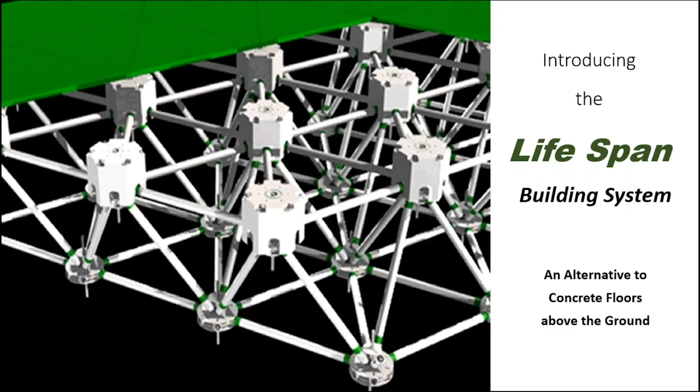I am Doug Leonardi. I am the president of Leonardi's Workshop, as we call it, but also the developer of a system that we came up with a few years back, specifically called the LifeSpan system, as you're seeing here.

LifeSpan Building Systems was started originally, we're a private company working with WPI, but we were originally created to improve the built environment after 9/11.

I don't want to get morose, but the fact is, after 9/11, everybody started looking at the political and the military and the economic aspects, and I looked at the mechanical engineering and wanted to know how to make sure that never happened again. So it wasn't to me about anything other than making sure that no matter what hit any building, that building should never itself be a danger.

So first of all, it was founded with the idea of improving the safety of buildings, then the livability of the buildings. And then once we started to do that, we realized that improved the sustainability of the buildings much more than we expected. In fact, much more than some of the other products out there designed specifically for sustainability.

Who we are right now, and this is important to the conversation, we are system tested, but not certified for use in industry because we haven't gone through all the factory mutual testing. We have done our lab testing, and we have proven the fact, and we've done all of our analyses, and every professor and engineer involved in this knows that it's going to work. We just have to get factory mutual certification before anything can be built right now.

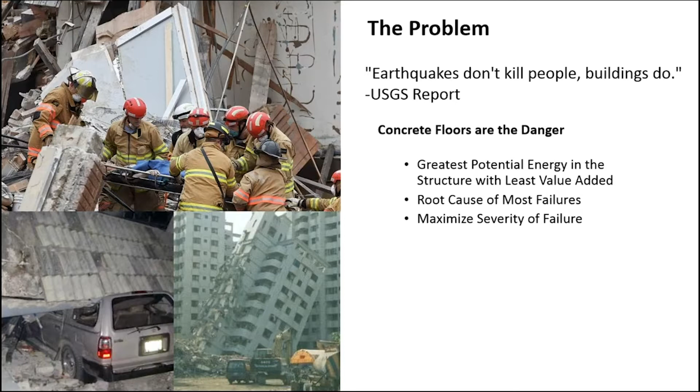And even though we had multiple ways in which it could fail, it usually was the weight that was doing it. And they also maximized the severity of the failure.

And they are the reason why most injuries and deaths occur, and it is the floors and the concrete that endanger the first responders when they show up to a building. They also create dust and waste when they collapse, and there are carbon emissions just from the construction of them. So, not to mention costs.

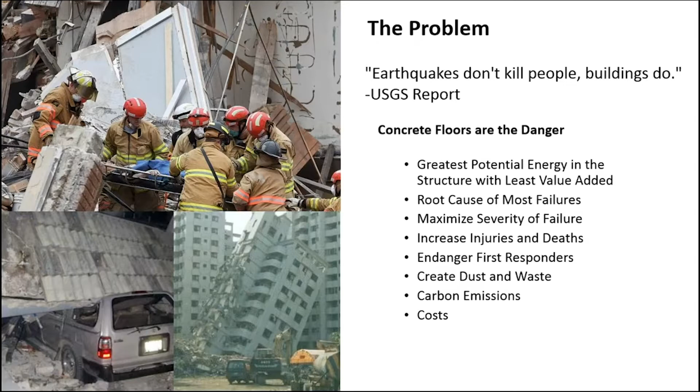So when we looked at the buildings, we realized that the real problem in the way buildings are built today was in the concrete floors.

They cause progressive collapse, which is infrequent, but it is immensely severe and complete. Destroys the whole building, everybody in it, in a matter of seconds, usually, before anybody even knows the building is failing. And it's always the fault of the floors, because you don't have enough weight to initiate progressive failure other than with those concrete floors.

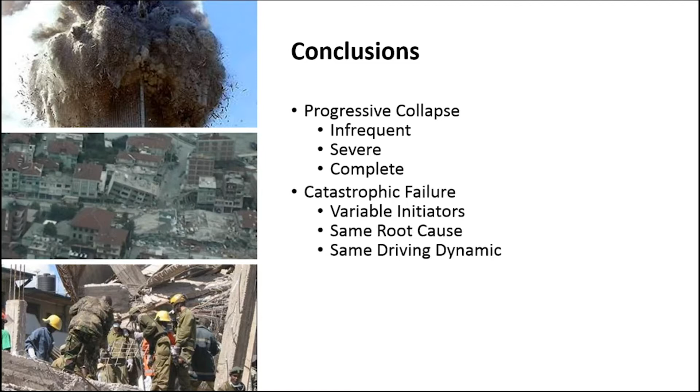Catastrophic failure comes from a lot of different places, but invariably it really comes from the weight of the concrete floors driving down. Now, in the last 20 years, we've gotten better at making sure they don't fall down as much, but when they do, they still kill just as many people.

And in the end, boiling it all down, we figured out that the floors are really the weak point of the design of modern buildings, that essentially we have improved every aspect of our buildings over the last 100 years, except we're still making the floors out of stone.

As Daniel Levitt said, we need to make sure that when these things happen, they don't kill everybody. We can't make a building that will not fall down at all.

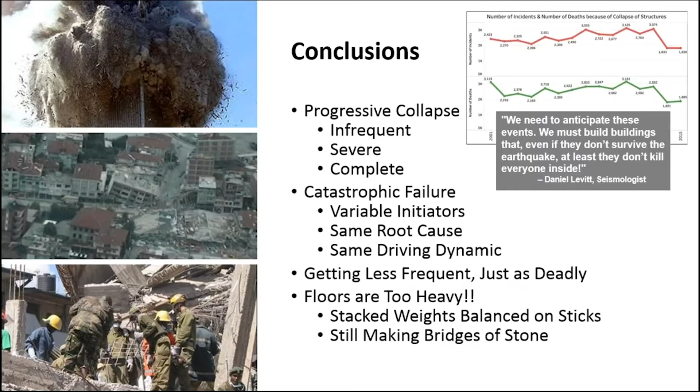We can only make one that doesn't kill everyone when it does, because eventually everything's going to fall down. They're all just weights being suspended in the air. Less weight, less chance of it falling. So our solution was to replace the concrete floors completely. That removes the potential energy of it. It removes the potential for progressive collapse entirely, because no floor has enough weight to trigger the collapse of the floor below it, which triggers the collapse of the floor below that. And that's really progressive collapse.

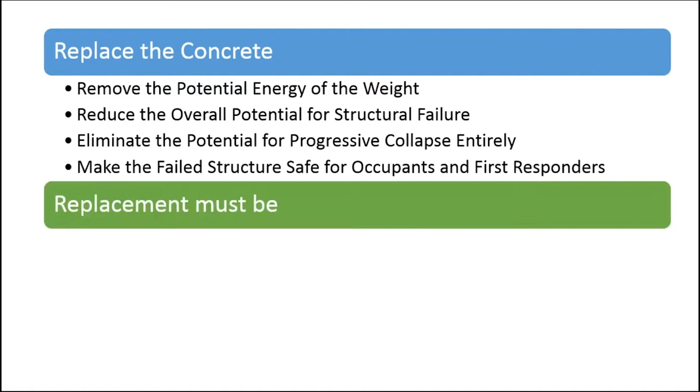We had to make sure whatever we replaced it with was stronger, but lighter and just as rigid, because it has to still do everything that the concrete floor did. It just has to do it lighter and more flexibly. And it has to be at least cost competitive with the existing solution, which is basic concrete.

I'm actually getting a lot of wind out there. I might get a tornado, we'll see.

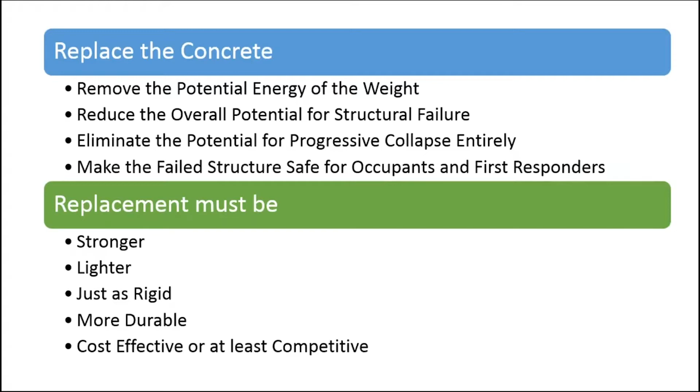In any case, what we came up with after a couple of years of looking at this was a system we called the LifeSpan system. It used to be called Safety Span, which is why there was some naming confusion before, but it's currently called the LifeSpan system because it's actually much more than just safety.

The system as a whole is much stronger, safer, and lighter than any concrete floors in existing buildings today. Easier to put in than existing concrete and actually cheaper than concrete. And then when we looked at the whole thing, it was immensely greener as well. Far more sustainable than any of the concrete buildings being put up today, sometimes by an order of magnitude - sometimes a 10th the concrete carbon emissions coming out of that building.

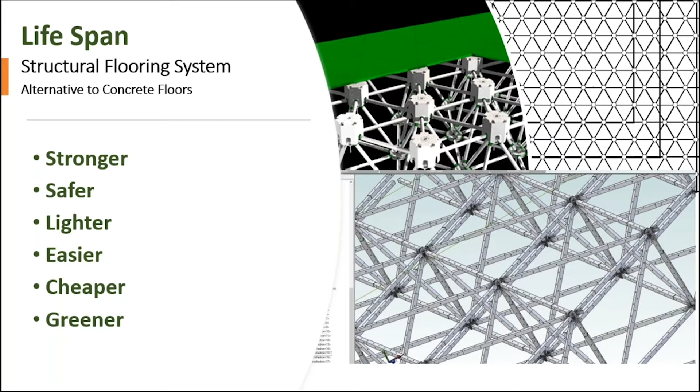In any case, we'll get to that in detail. Please, by the way, I'd like to have a conversation. So if anybody here is either concerned or has questions or is confused, please speak up.

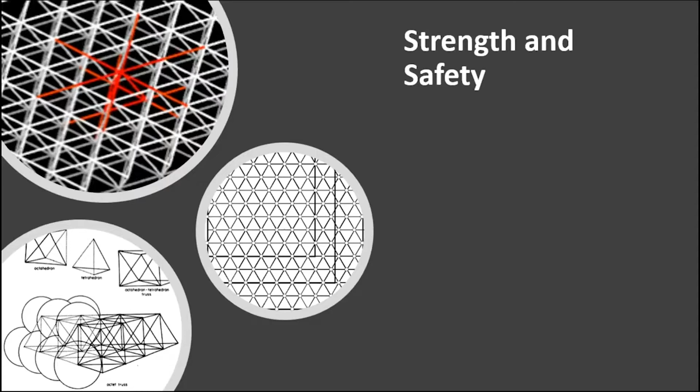Our key here was to make sure that whatever building we make is going to be strong and safe. So we came up with a cage in place of a concrete slab. That cage had to have a rigid geometry, but also a shock durability.

So it can absorb some level of shock. There's the ability to dissipate energy into the frame, but also have enough rigidity to be able to keep the building straight the way concrete would as a rigid membrane. Load redundancy, so that if any part fails, there's always other parts to pick up. So we have a three-dimensional geodesic lattice that is ideally geometrically designed to make loads redundant, dissipate them across the entire frame, and minimize the load on any given component.

Because it's a regular geometry, you can infill to an existing building and you don't have to worry about cutting around edges and worrying about where you're going to pour concrete. We just have a standardized geometry we're going to put in there with any size frame wherever we want it to go. It's easy to design because of that, because it's a homogeneous geometric frame and any CAD can figure that out.

And then we have lightweight components so that the whole thing becomes so much lighter than existing space frames that it becomes essentially a fabric stretched across the frames inside of the building. We're maximizing Buckminster Fuller's geodesic geometry here. Essentially the same geometry that goes into making a geodesic dome, except instead of being a dome, it's a flat surface.

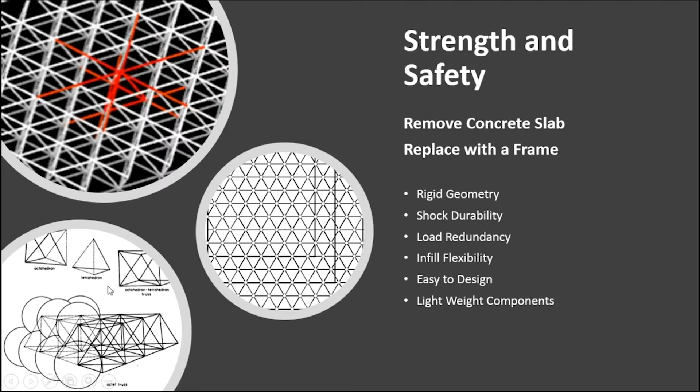We take that, we make three functional layers. The structural layer that goes between the girders of the building and actually carries the load. The architectural layer that goes on the surface so that you have walking surfaces and ceiling tiles. And then there's the fire protection layer in between the two that actually protects the entire frame and the floors above and below from fire. So there you have all the three functional aspects of concrete. You have a subfloor that can hold all kinds of loads, handle any kind of shock, and protect you from fire for up to 4 hours between layers.

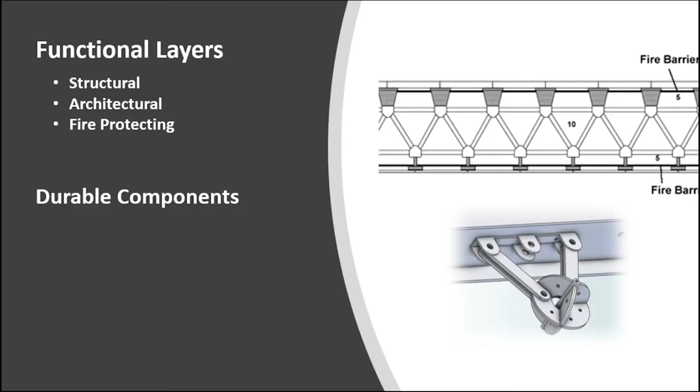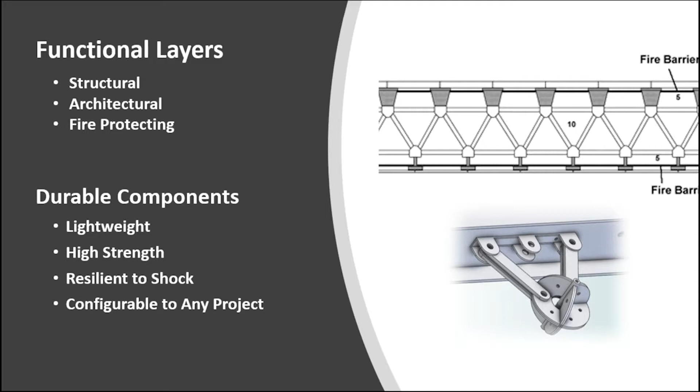We make the frame itself out of durable components so that each one is factory made to specific standards. They're simple - there's only 3 of them for the frame. They're lightweight, they're high strength, they're resilient to shock, and they can configure to any project. So we don't actually have to worry about whether we specify something perfectly in the CAD stages. We can just ship a whole bunch of these things and assemble them and then adjust them as needed to be able to make the frame space we need.

So then we isolated the components and looked at them individually. We have the struts, the joints, the mount points - that's pretty much the whole frame. There's a couple extra ones for adjustments, but there's really only 3 of them, so they can be perfectly designed and standardized.

Then we have insulation and isolation. We're going to isolate noise and vibration within the building through these panels, and we're also going to use fire panels to protect us from fire. Each panel can stop up to 4 hours, so if we have 2 layers, you've actually got 8 hours of fire protection in your building.

And then there's the envelope we put on the floor panels, which is like a Trex-like material that is durable and paintable. You can put screws and nails into it, or lay carpet on top, or wood paneling, or whatever you want.

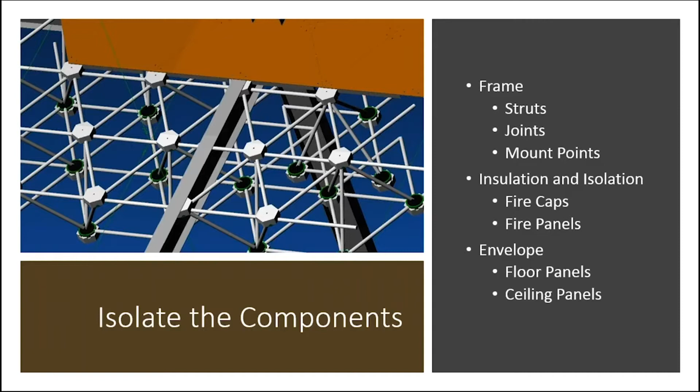And then there's ceiling tiles underneath. So even something as simple as the ceiling tiles - let me jump ahead here for a moment - even something as simple as the ceiling tiles, we engineered to be as perfect as we could.

So we got a lightweight panel that is also acoustic damping, like any fire panel should be, and it's fire rated. Then we can have other ones that have openings for sprinkler heads, standardized so you just pop them in and have a sprinkler head attachment right where you need it - no extra machining from another company to do that.

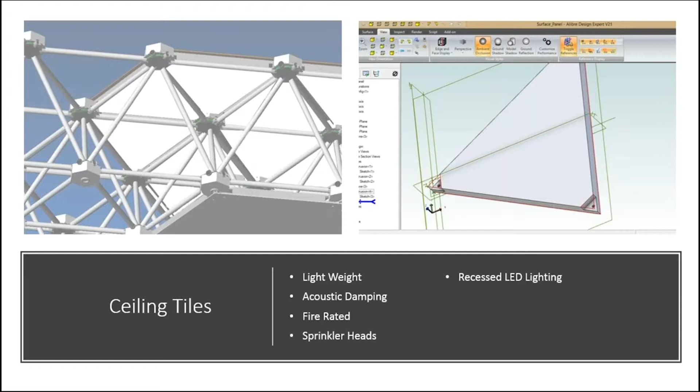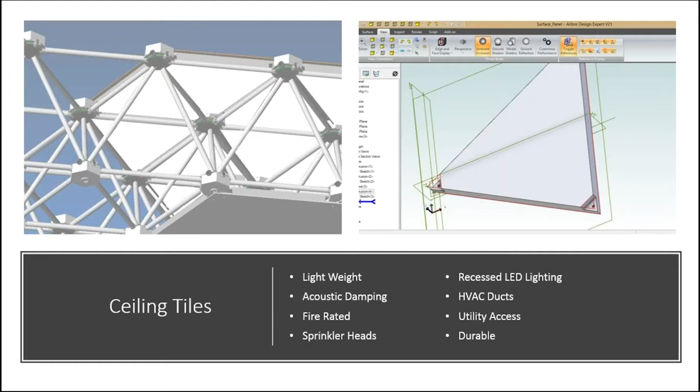You can put recessed LED lighting into them, or HVAC ducts, or utility access ways. Most of all, these components are as durable as they can be so they can wear and tear. You can take them down as a facility owner, swap them out for a new color, or replace them when they get worn.

Every one of the components has been engineered this way. We went through all the different levels - there's about a dozen components to the system. So now, instead of a process for building floors like pouring concrete, what you have is a product line of a dozen or so components.

And the frame pieces have been engineered to make sure they only go together the right way, and they're color coded and lock together so you know your building is secure. But they can be removed if you use a very special tool and twist it the right way, unlock them, and pull them apart so you can take them apart again after the fact.

Everything in here has been engineered so that your facilities people can run the building long after you're gone with the components we have, without having to have special things custom made for them.

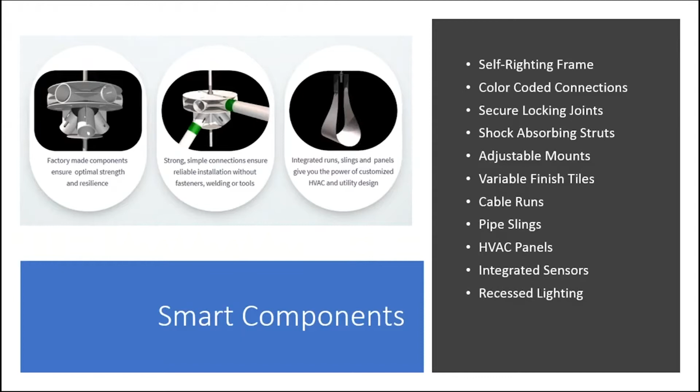All this means you have a much easier design phase and construction phase, and that is really appealing to builders, developers, and architects, because it simplifies every step in the process. And when you simplify the process, you make it cheaper for them.

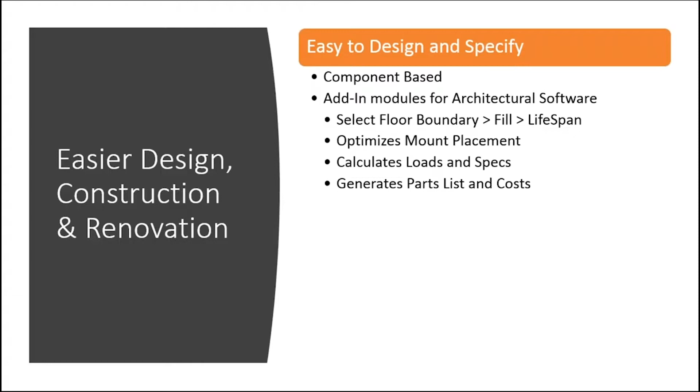So when we talk about cost in this, really I'm talking about base cost. I'm not even talking about the additional costs - how much less it costs for the architect to do the CAD designs and specifications for the floors, or how much it costs for the maintenance crew to change something because they don't have to cut concrete anymore.

All this leads us to a conclusion that this is not just a cooler way to build, a smarter way to build, a cheaper way to build - it is a greener way to build, because in the end it considers the full life cycle of the building, and it realizes that the building is not just a pile of bricks. The building is a living, changing entity.

From the lower embodied energy of construction to the cleaner installation on the job site to a more efficient operation, we made the building reconfigurable. So now, in 10 years or a year, if you decide that wall or that floor or part of the building shouldn't be the way it is, we can change it. We don't need to demolish things. We can reconfigure our building to the tenant's needs over time.

The parts are all reusable and recyclable. It is 95% steel, which means you can take the components apart, ship them back to us, and we'll recycle them and make new ones and ship them out, and you'll have brand new ones. So they're recyclable, unlike concrete.

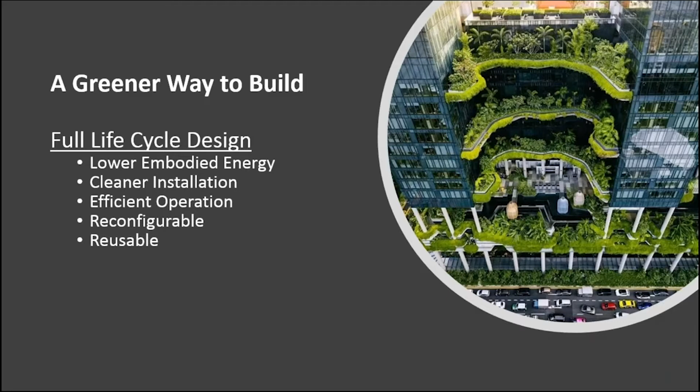Concrete, for the most part, goes to waste landfills. And even today's concrete, which is supposed to be lighter and better, is lighter and better because of synthetic additives, which make the concrete even less recyclable. You can't even grind it up and reuse it because of all the additives now.

It is upgradable now - we come out with new components in a couple of years that make the struts, the joints, or the panels better.

We buy new panels and people just swap them out. You can make changes to existing space and add in a better floor, better ceiling tiles, better lighting systems, or stronger struts. And we're very proud of this.

I know this picture is deceptive and people think green building is something that it isn't, but I used this picture on purpose. We literally want to have the living roofs and floors that everybody talks about. And in doing so, we've gone out of our way.

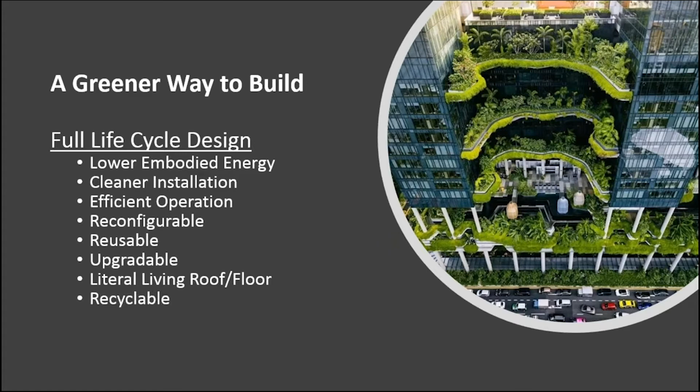I want to jump forward here and show you something. We improved the interior here, not only in the cooler, bigger open spaces with lots of lighting, because with a much lighter floor, you don't need the columns that you had before.

But we've actually been working on these panels, which are recessed basins that can handle water and soil. And they have fixtures in them for hooking up to hydroponic systems so that you can water, feed, and reclaim water from the soil inside or outside your building.

So you can essentially have potted plants in the building that are more like a garden than they are like potted plants. And your roof can literally be a living roof, but not just the kind where they put out some trays. This is literally built into the building with the piping system underneath for it to automatically run and reclaim the water.

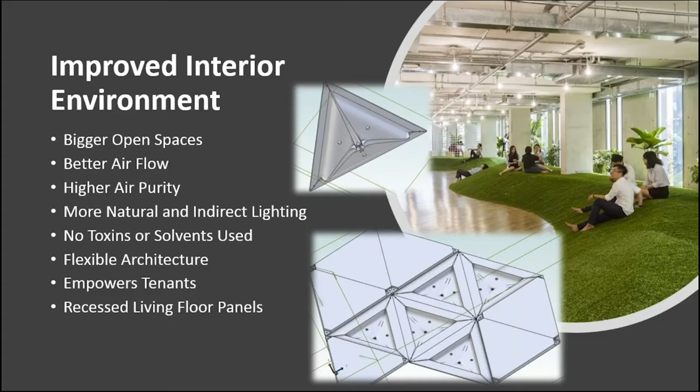And this is the same panel, same space, same standardization as the walking tiles. So you can interchange them. You can use them inside, outside, alongside the existing panels within the same frame. So I actually look forward to the idea of making truly green buildings in this sense here.

Go back a little bit though. But from the energy standpoint of green, lifespan is immensely green compared to concrete, which again is in most of tall buildings. In every way, not just in the embodied energy of it, but in the transportation of it, in the waste coming from it, in the better insulation values you get from it, and in the optimization of the building itself.

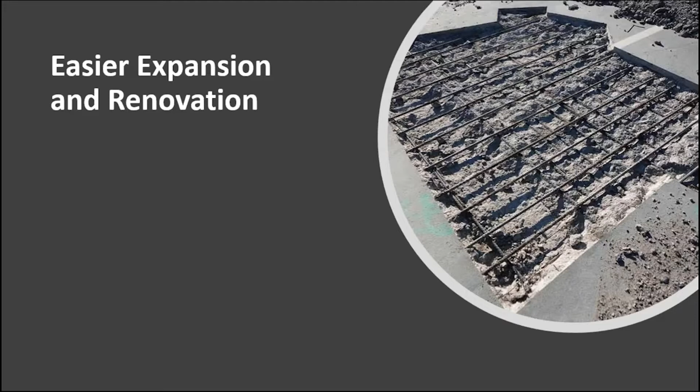I apologize, here we go. And this is important. The final, most green part of it is renovation and expansion, because what's often overlooked in buildings is anytime changes are needed or the building needs to go away, there's very little recycling going on. It's pretty much demolition, cutting concrete, waste, and mess.

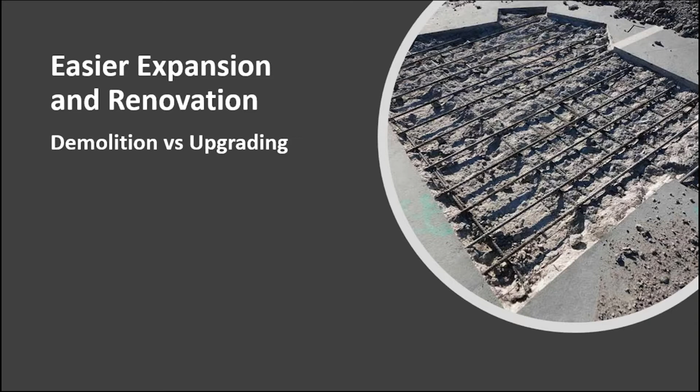And with the safety lifespan system, you can add floors, you can remove floors, expand your building, all just by changing out parts, by swapping out the existing frame, putting part of it out of tension, pulling the parts out, putting new parts in, putting it back to tension again.

So essentially what you have here is a configurable machine rather than a building. You can resource, reroute everything, all without cutting any concrete, because as far as we're concerned, concrete should not be above the ground floor, except perhaps in columns for load bearing. It's a compressive material. There's no reason to have it in a suspensive mode.

As I said, this is really looking to a new way of thinking about buildings, because the old way of building buildings is we have solid stacks of concrete slabs held in the air, poised on top of columns that are, by the way, perpendicular, which is the worst way to hold something, because any kind of lateral shock makes them all just tumble like a house of cards.

So you've always got to have bracing and all the things that do that. Whereas in this case, safety span or lifespan is a suspended frame that is actually hung from the vertical members of the building. And what we wind up getting, instead of a pile of building materials, is a dynamic machine.

Essentially, they're components within components that hold the entire structure together, become part of the structure, reinforce it rather than put load upon it, and can be configured, adapted, and changed by you.

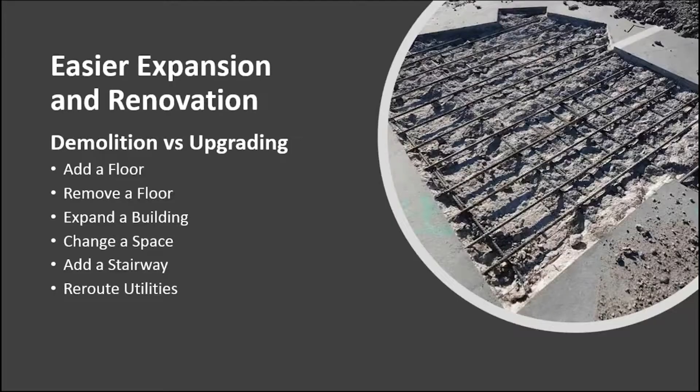I let you jump past the slide about embodied carbon very quickly. Do you have any calculations comparing to concrete? And is this recycled steel? I had the impression it was, but maybe it's not. No, it is recycled steel, and that's part of the point.

We try to make our material out of both recycled steel and recycled plastic or high density plastic, like Trex. So I guess I have a question too on the installation. Does it come in, so transporting, it would have to be made at your facility, transported to the site. How does that transport work? Does it have to be in grid form when it comes out to the site?

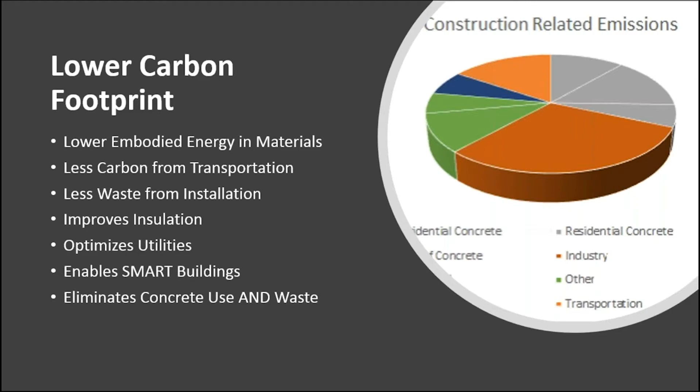You can just assemble it all on site. It's always assembled on site. That's actually the point. You don't ever need cranes to lift this in place. Every component is light enough to be picked up by one person. Nothing in this thing is bigger or heavier than a human being can handle. So the premise is no one should need heavy equipment, welding stuff, cranes, dump trucks, concrete mixers, pumps, any of that stuff on site, because now your installation becomes a matter of—let me go to the end.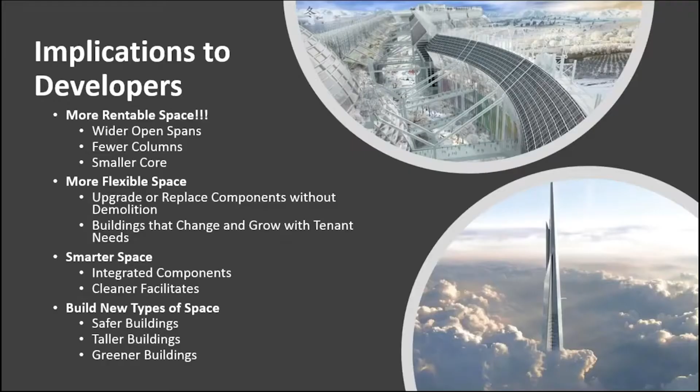Like underneath here, but what you're not seeing is the way these girders are - the drop ceiling is below those. So really, when they put the cladding on, this top 2 feet is actually used by the ceiling. That's where your HVAC and your utilities go.

And you mentioned acoustics - I would think steel would carry sound a lot more. Is that something you can completely eliminate with acoustical tiles and such? Yes, there are two aspects to that. The acoustic tiles are a layer. Above that layer is a fire layer, and above that is the frame, then another fire layer, and then floor. Those are actually layers of fabric that are going to stop real sound per se.

But as far as vibration is concerned, the steel does vibrate, but the struts are such that when they connect to each other, there is a rubberized connection that absorbs shock and vibration. So at any given strut that's exactly 30 inches long, it can contract to as much as 29 inches because of that rubber core. So if shock comes through the building, like an earthquake, it can pass through all the components without shattering everything or breaking steel. They all give a little bit and then allow vibration through.

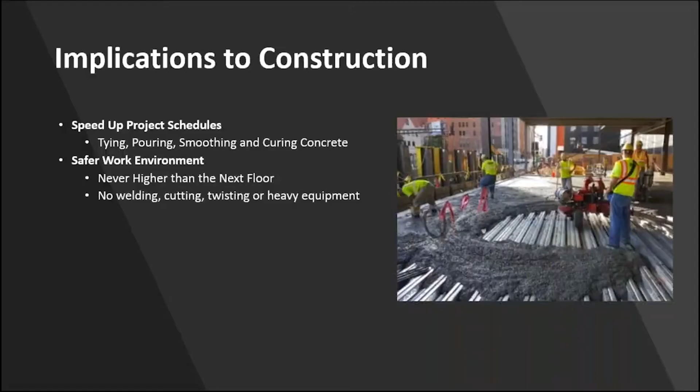If we look at, for example - I'll zip down here because we want to talk about comparisons - here's the South Station Tower in Boston going up. That building will have 51 floors, and it's going to release 52,000 tons of carbon, because by my math they're talking about pouring 70 to 100 million pounds of concrete. With the LifeSpan system, that exact same building would not release 48,000 tons of carbon. Now, it's not a question of how much you'd use, because I can't estimate how much more efficient the building will be as far as insulation or anything like that - that's the thing we'd have to prove. But I know for a fact that just removing the concrete alone removes 48,000 tons of carbon from that building's construction.

Every building, right here at WPI, there is a new building going up, and it is 4 stories high, but it has heavy duty floors designed to hold heavy machinery. As a result, it has 6 million pounds of concrete inside of it right now. That's 6 million pounds of carbon that were released because that building had to go up. We literally could have eliminated all of that concrete carbon.

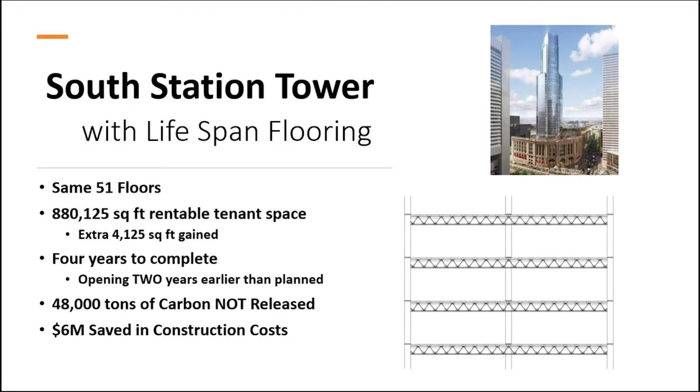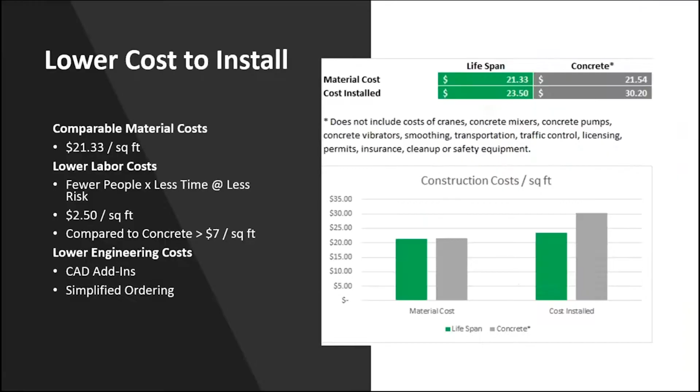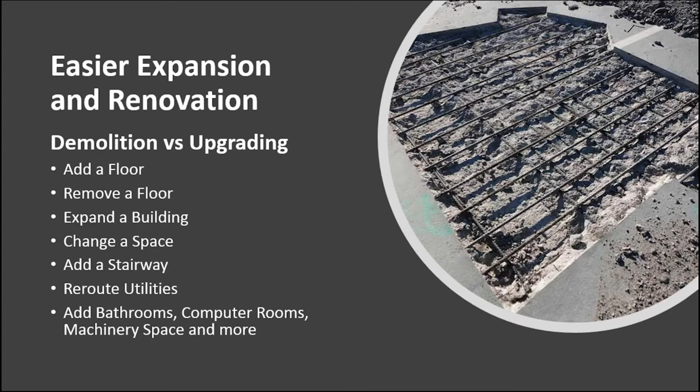Yes, steel has some embodied energy, but this is critical here - we're using almost the same steel in LifeSpan as they're using in this other building. I have another picture someplace, but I don't want to go get it right now. I'm sorry, it's going to seem awkward. But there is just about as much steel in this frame as there is underneath this concrete.

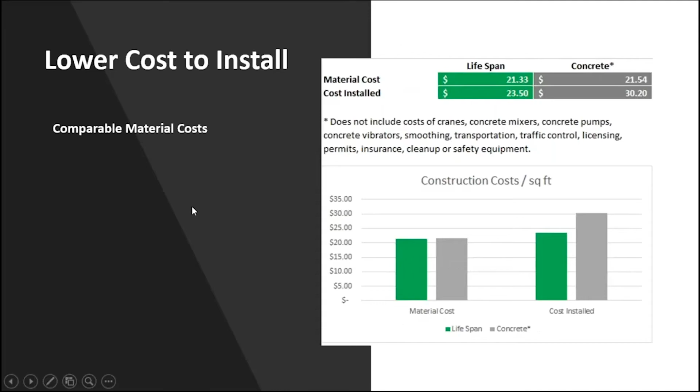Does that make sense? So you're saying the combination of the rebar as well as the steel? Exactly. All this stuff they're putting down, this steel plate, this corrugated steel plate, as well as these trusses, and this rebar that they fill in, is about as much steel as we use in our frame here. So it's the same almost embodied energy as just the steel they use.

Then they pour concrete on top of it. And it's literally unnecessary. It adds weight to the thing. In fact, they have to calculate the amount that this is going to sag from the weight of the concrete so that they get an even pour on top, and it actually behaves like a lens, as you know, because it's so heavy.

So when you get a large span like that, if you go more than 20 feet, you're going to have to get this truss deeper because it has to handle the length of that concrete you're pouring. So they use almost as much steel as we do, or a little less, but we use about the same steel. And then we have a little plastic for insulation and fire protection. And then we just provide a floor without having to pour concrete on top. It's a totally usable subfloor that you can put nails and screws into, ready to walk on.

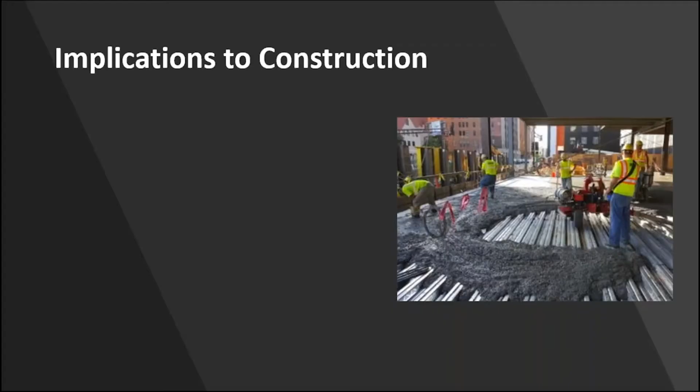Can you speak a little to the panels themselves and what sort of materials those are? Yes, we've had a couple of options, and frankly this is a project where we're trying to get this to the point of production. We've done the research here in the labs - this is a WPI kind of project - and what we've come up with is Trex for starters, but with a fire stopping backside. So essentially the surface inside is a recycled polyethylene, high density polyethylene that can take a screw, nail, tack, or glue, and it's got a roughened surface, but on the underside it has a silver reflective fire stopping panel.

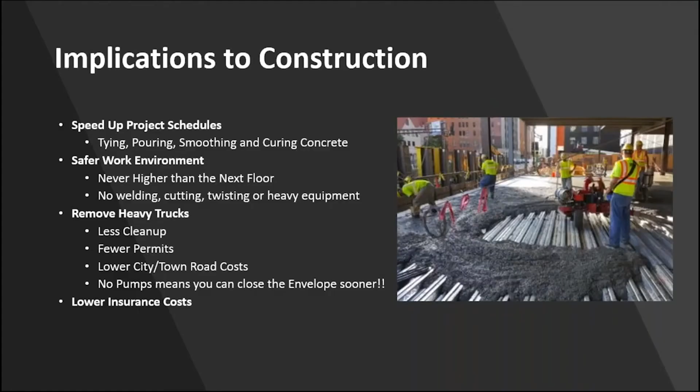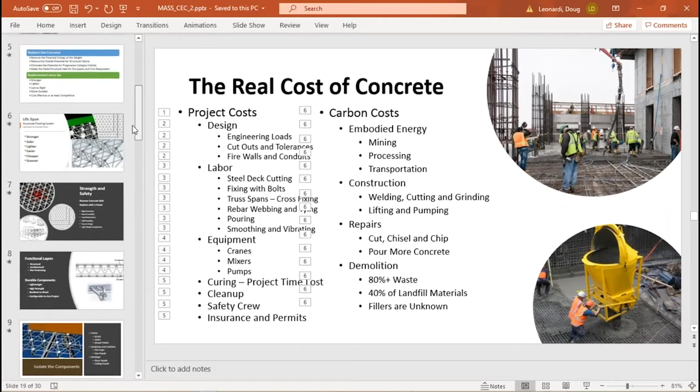And those mount at the joints to the frame itself. Let me jump around here, it'll probably be easier for all of you than watching me do that. As you can see here on the top. Did that answer your question? Yes.

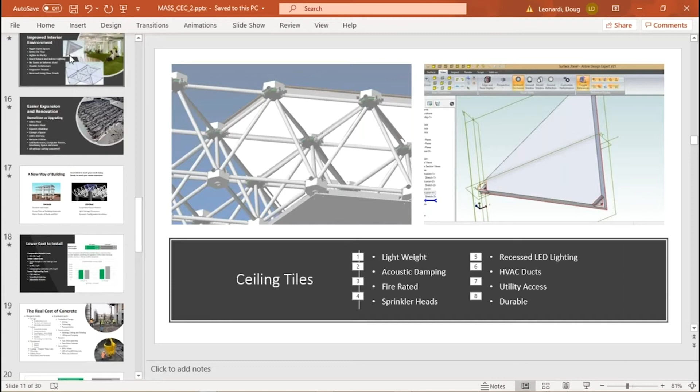I'm just curious how you're getting up to the 8-hour or 4-hour fire rating. Well, we have multiple layers of it. So these are fire rated by themselves, and then there's another fire panel specifically that goes underneath these, and above the ceiling tiles. So essentially, we sandwich the frame in airtight 2-hour fire panels, and there's 2 layers of it. That also helps not just to stop the fire from spreading, but to keep it contained within the frame. Since most fires tend to be utility fires, if the utility fire happens within the frame, it'll get smothered because both sides of the frame will have the insulating tiles keeping the airflow contained.

That's the plan. And in fact, the same tiles, since it's all geodesic, these same tiles that you would use to build, say, the surface, can be put on the inside of the frame to make HVAC ducts and fire domains.

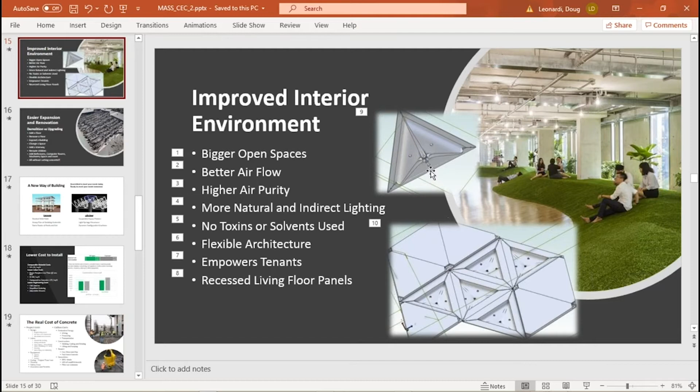The idea here is to simplify this so that facilities can do their own design, HVAC, fire safety, whatever, without having to have a special group come in to do it.

Can these span systems integrate with wood frame construction, or are they mostly for steel frame? Actually, you could put them anywhere. The key is the mount point at the steel—we can make mount points for wood, for concrete. We have ones that are like pitons that go into stone or concrete, and ones that can go on as a belt around an existing column without damaging it. You can put a tension belt around it with multiple mount points. One of the hallmarks of the system is to be as flexible as possible.

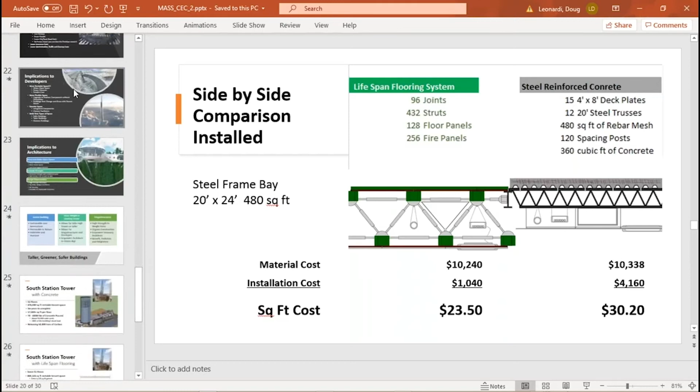We tried to make it so you could use this for almost any kind of architecture, and people can now use this to make their own homes or retrofit existing buildings—for that matter, hollow out an old building, take out the old floors, but use the existing brick walls and put in nice new floors.

And it does aid with the lateral loads per floor, so you wouldn't need any additional moment frames. No, in fact you'd use fewer because you're putting less dead load on the frame, so whatever was there before, this is going to probably be lighter.

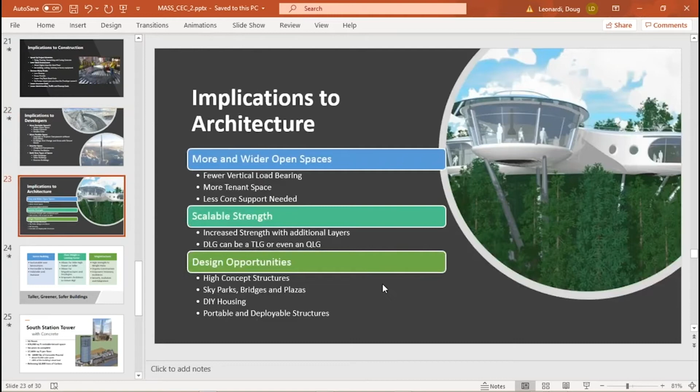There's no reason this couldn't be used fully three-dimensionally to make vertical walls as well, or columns. So while this is a tension structure, it can be used as a vertical column, filled with concrete, with the mount points at the correct geometry for the floor above. That was an original idea of this, but we've boiled it down to just the floors now because it's critical—we see this as very low-hanging fruit to fix a problem in buildings that's been long overlooked. But in the end, what we're talking about is a building system that could be used to make columns, walls, floors, anything.

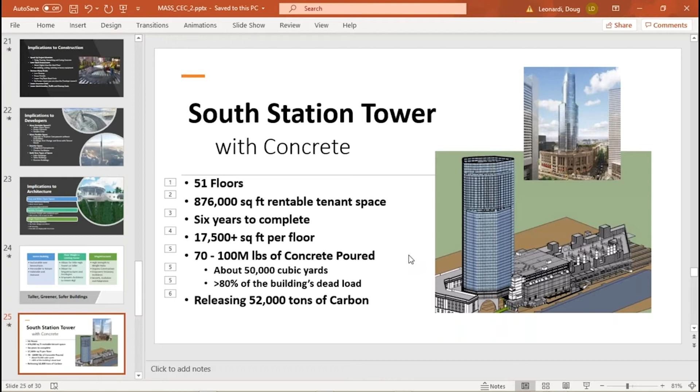In terms of training for labor, is this specialized enough, or could a GC learn it fairly easily? Exactly. One of the things I've heard from iron workers, architects, builders, and developers is that it's so simple to use, it's almost impossible to put together wrong.

It's literally like industrial grade Legos that lock together once they're assembled. The geometry is symmetrical and regular—all 60-degree angles. So you're just putting a joint to a strut, then a strut to a joint, and a joint to a strut, and that makes a frame. Then you just take the panels and drop them down on top.

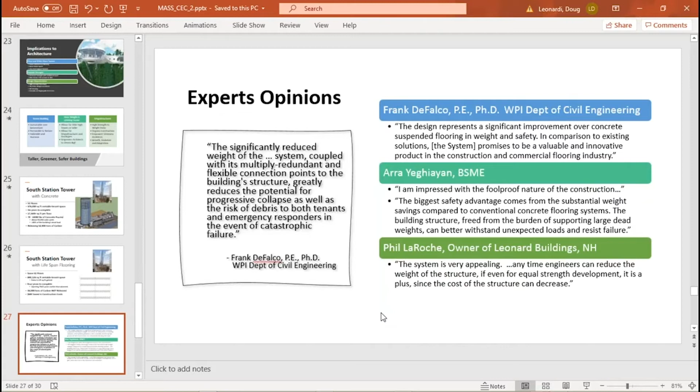That was me putting it together in the shop, and it was incredibly simple to do. This was even a prototype that had screws, and the final version has no screws—they just lock together. So it's even easier than this.

The point was to not only make the building safer, but to make the construction site safer. If we can remove the welding, cutting, concrete pouring, cranes, and the concrete itself—which is a caustic material—we remove all that from the construction site and just make it an assembly job. Not only is it easier and safer, but cheaper, because I can do it faster.

And when you're done with it—say you drove a pickup truck out somewhere, built yourself a cabin, and stayed there six months—you can take it apart, put it back in the pickup truck, and go.

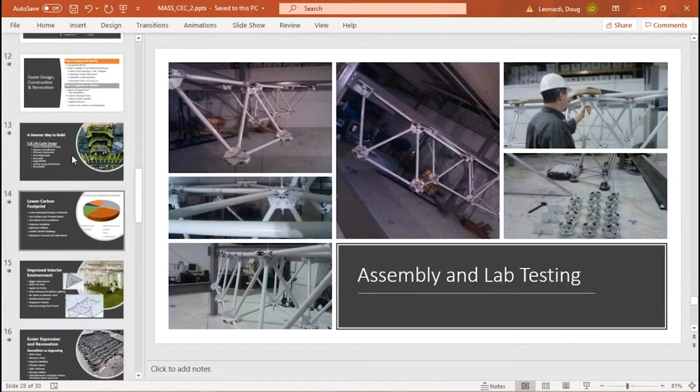You don't technically need a foundation, because here's the thing. If you build an old building like a pile of building materials, you need a foundation, because you need something flat and stable to hold your materials on. But if you build your building like a machine that is self-righting and has integrity, it doesn't need a strong foundation to stay right. It can actually be self-righting, and it's light enough that its own forces overwhelm the weight of the building. So you can put it on fairly stable ground without necessarily having a 6-foot deep foundation. The building itself is light enough that it can sit there almost like a fabric structure or lightweight wood structure. It's strong enough to hold its own geometry.

Doug, you had mentioned that 1-inch kind of flex that it has. Could that also be considered like a built-in tolerance? Because we know construction sites don't come without imperfections. So does that allow for a certain degree of tolerance for leveling?

No, that doesn't. There are adjustable ones at the perimeter, though. There are interface components at the perimeter where it connects to the building, the mount points. Those are adjustable for any tolerances. So if this beam isn't exactly where it should be, that's okay — we'll adjust to the 4 inches or 2 inches or whatever it is to the beam. Those are actually adjustable within 6-inch tolerances. So they're very adjustable, and they're designed to apply and remove tension from the frame if you need to.

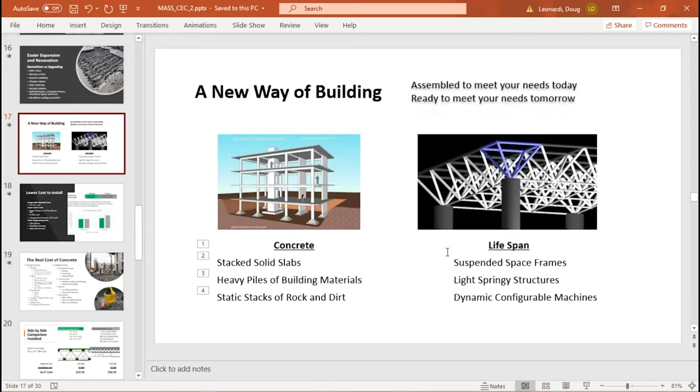Doug, forgive my ignorance, but you mentioned in terms of building types that this might replace the floor, like the South Station example with a high rise and different floors. At what size building do people start putting in concrete floors?

Let me get a couple of pictures here. Would multifamily buildings pass a certain threshold? I don't really know myself, so that's why I was asking about podium buildings.

I've seen two-story steel structures around here with concrete floors, and I see them going up all over the place. They're generally anywhere from 4 to 6 or 8 stories. There are the big ones. I'm trying to find the one here, the one at WPI.

But so like a 6-story multifamily, would they have concrete floors? They could, but more commonly, here's the problem, and I almost see this as a bad thing, is that nowadays they're making them all out of wood, and wood's great and all, but it just seems so limiting, short-term, and fire unsafe.

Maybe I'm just reading into that, but the 5/1 or 6/1 podium buildings would traditionally have a concrete deck in between the ground floor commercial and the residential above, and that's usually where it transfers the wood frame. But you're talking about that thermal break issue with the steel?

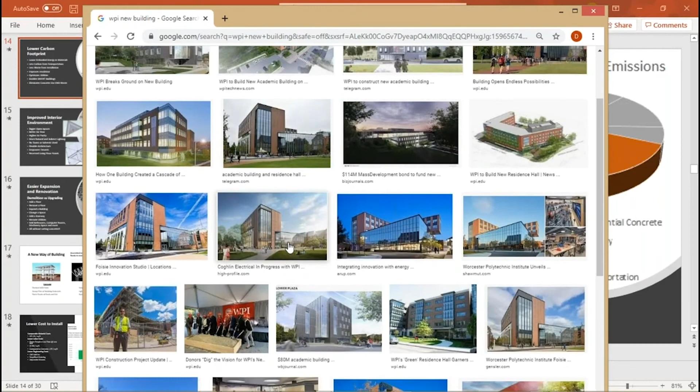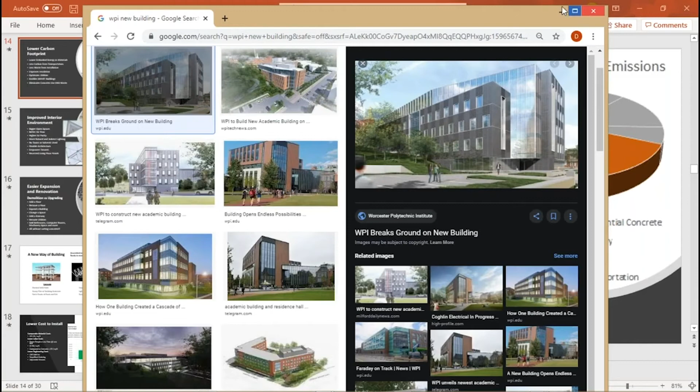Yeah, I mean, that's something that is always a concern, especially if you have parking underneath or a parking deck involved. With passive house principles, we're looking a lot at how to get that thermal break. If this had an integrated thermal break within the system, I think it would make it even more viable. Easier, right? Do you understand, Doug, what we're talking about with a thermal break?

Maybe I'm not. Are you talking about just a barrier between the frame and the vertical and horizontal members, or what? Well, just for conductive heat loss through the assembly, so you wouldn't have any heat loss going out through the floor plate system to the walls or whatever.

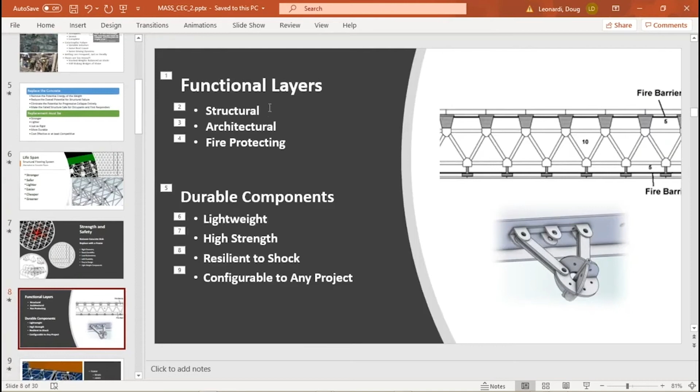There's no reason we couldn't have an insulating plate in there. They're just now mechanically connected, but there's no reason why they couldn't be. In fact, like I said, the layers have been designed specifically to be structural, architectural, and fire protecting, but really what I meant was insulating.

So insulating is everything, including sound and temperature. These white panels here are a high density plastic that isolates the full floor panels above from the steel of the frame. There's a joint inside there, a mechanical joint that is steel, so those are mechanically isolating the floor from the steel of the frame.

We could absolutely put the same kind of thing in between the girder and the joint, the mount point. Do you understand what I'm saying? So that thermal barrier could easily be put in there. We just hadn't really thought of that, but there's no reason it couldn't be, sure. That's the kind of feedback I want, yeah. I didn't even know that was an issue.

So I think what Travis is saying is there's a big movement in Massachusetts towards passive house multifamily, and a decent number of those are going to be podium style, with commercial or parking on the first floor. Traditionally you would put a concrete deck between that first floor and the second floor, and this could be a replacement for that.

But because they're working as a passive house and very concerned about thermal bridging of heat from inside to outside the envelope, since that's one of the biggest things you try to reduce in passive house, if you design one of those white things to break that thermal bridge, that's a marketing point for that particular style of building.

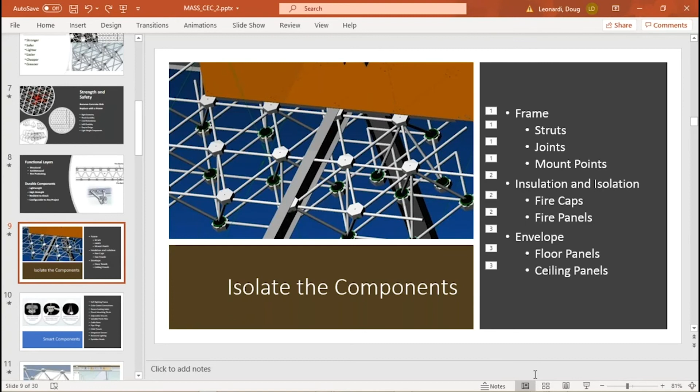So yeah, in short though, what we're looking for is somebody, or some way for us to be able to get this through Factory Mutual. And that may or may not require building a proof of concept demonstration building that we technically can't live in or rent, but we'd use it to prove the point. Or it may just be going directly to Factory Mutual. But right now we're at the...

Slide 29. Slide 20. Oh right, of course, I'm sorry. Yeah, I even have my slides up.

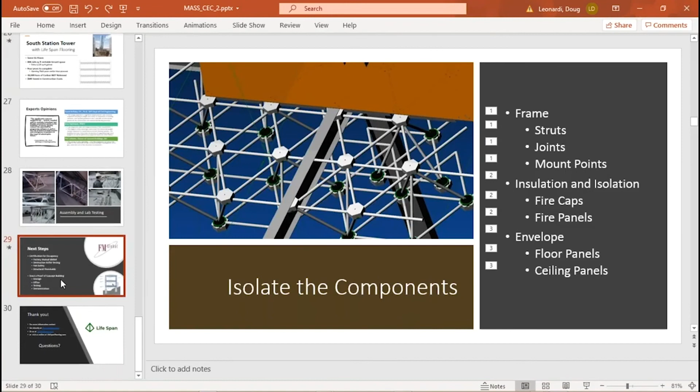So essentially we're talking about going through our ASTM testing for fire safety, because they have to take enough of our material to build a small building out of, and then shake it until it falls apart, put weights on it, light a fire under it, and all that other stuff. So that is actually our ultimate goal, of course, before we can release this.

And then after that, yeah, we'd probably take 6 months. ASTM testing is supposed to be about, based on the 28 tests, I'd say about a year's worth of testing at most - probably 6 months to a year, more dependent upon their backlog if they have any, but I don't know that they do.

And then in the meantime, we were also looking at the possibility of building a proof of concept building here at WPI or nearby, just to be able to use it as a proof of concept, to test it and demonstrate the wearability and usability, and make sure that we get the same results out in the real world as we did out in the lab.

So I know Michelle and Travis - oh, go ahead Michelle, go.

I was just going to comment back on the embodied carbon conversation for a minute. I was just thinking that, like you were saying Bev, it could be really compelling if you can attempt to quantify it in some way, because I think it will tell a really good story. And like Bev said, that's really sort of taking off, at least in our area, and some municipalities are even starting to consider requiring embodied carbon analysis for projects.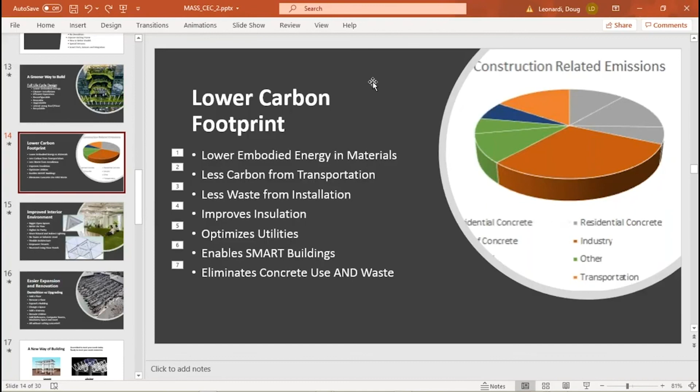The testing, the safety testing that you need to go through. Oh, the ASTM testing. The ASTM is really just for a product, like UL testing.

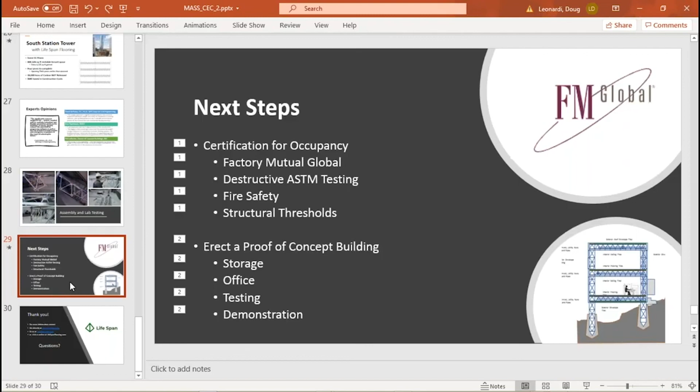I'd like to send this presentation or have a follow-up conversation with some people with more structural engineering background, because I think Michelle, Travis, and even Leslie and I know certain things and know how this could be appealing, but we don't necessarily have the chops to understand how much could be replaced and in what places, and where it wouldn't.

Yeah, no, I agree completely. Just so you know, I'm surrounded by mechanical, structural, and civil engineers here at WPI. When I talk to people in the civil engineering department, I was happy because I went to talk to one of them, and he had a model on his desk of essentially the collapse of a building that I'm trying to replace. So his focus is stopping buildings from collapsing as well.

After we talked about this, they're not only sure this is really the cause of most collapses, but - and this is important - it's the only reason why we can't build taller, bigger buildings, because we've literally hit the growth limit with concrete. By the time you get to a certain height, about half a mile or so, you have to really reinforce the bottom of the building, because it's like a tree - it needs to get thicker as you get taller, or stronger, because it needs to hold up all its own weight.

So if you know structural people, please show this to them - I have a feeling they'll probably react the same way. I guess there's also an organization, Michelle, you probably know it better than I do, called Structural Engineering 2050 - a bunch of structural engineers worried about the embodied carbon of what they're specifying. I'd like to engage some of those people.